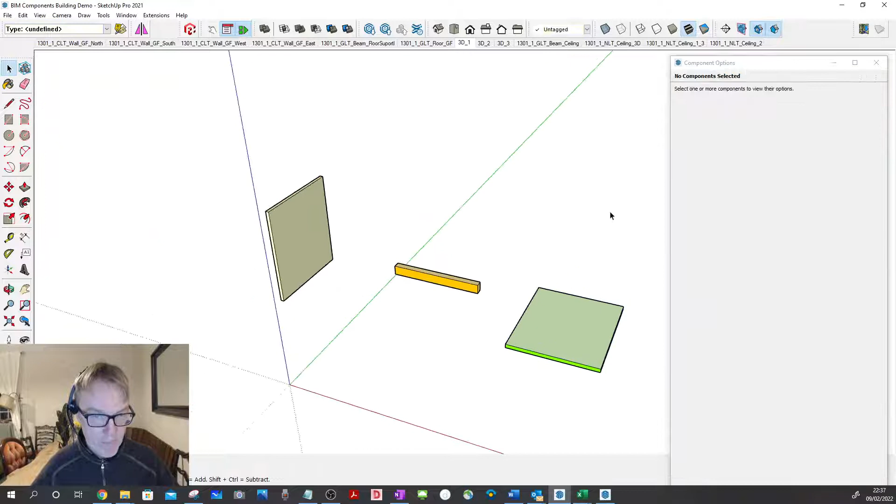If I go over to this building here, which is the ground floor module of the SNRG building, we can see that the CLT walls have been specified accordingly. We've got the GLT floor slab as a slab orientation. We also have some of the beams at the top acting as beams and the configurations required for that. And then we have the NLT, nail laminated timber ceiling panels. Again, the configurations for this.

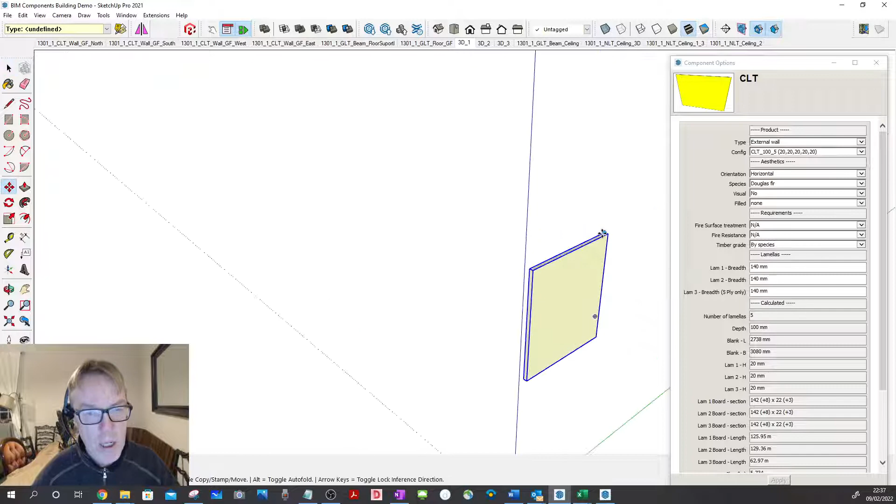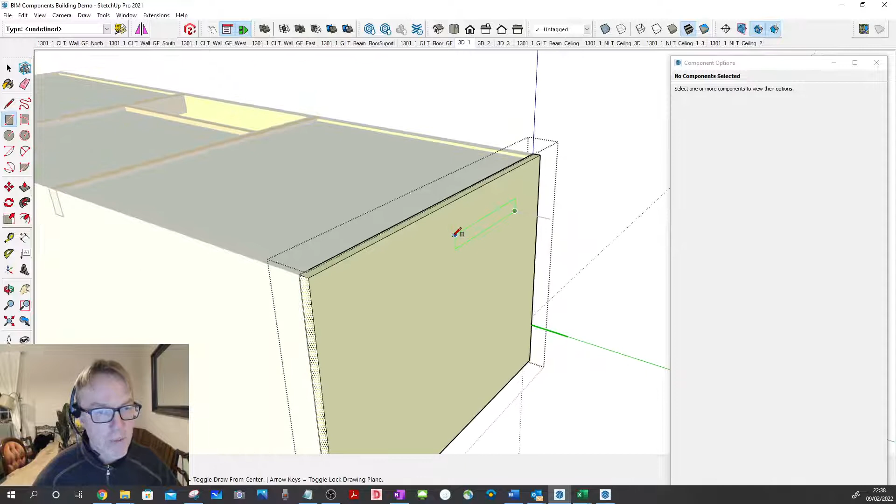If I want to finish this building off, I'm going to select my CLT panel. I'll move it or keep the original in place. I'll make it unique. And then I'll just fix my geometry first of all, and I'll also cut a window in this elevation. And then I'll go in to the option and modify for this particular building.

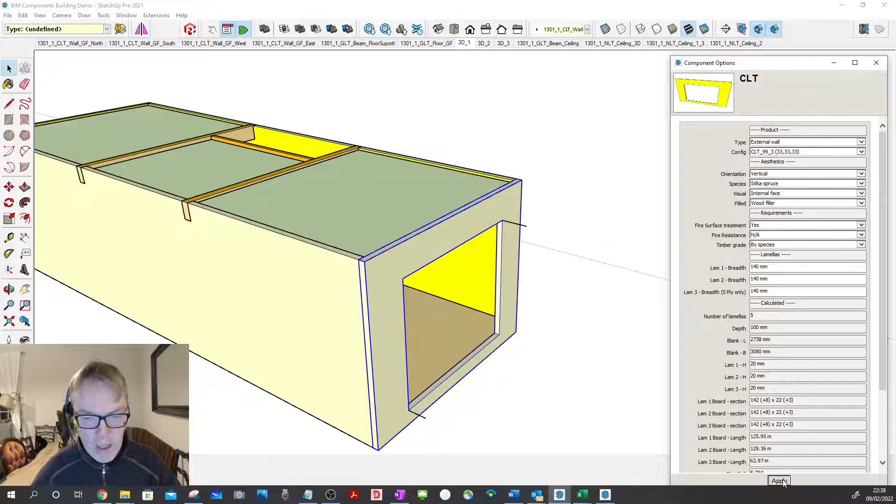I want the 99mm CLT, a vertical orientation, a Sitka spruce, visual on the internal face, filled with wood filler, surface spread of flame treatment. Yes, I don't need fire resistance. Grade by timber species, and that's all the options that I need to do. Press apply. We now have the ground floor module complete.

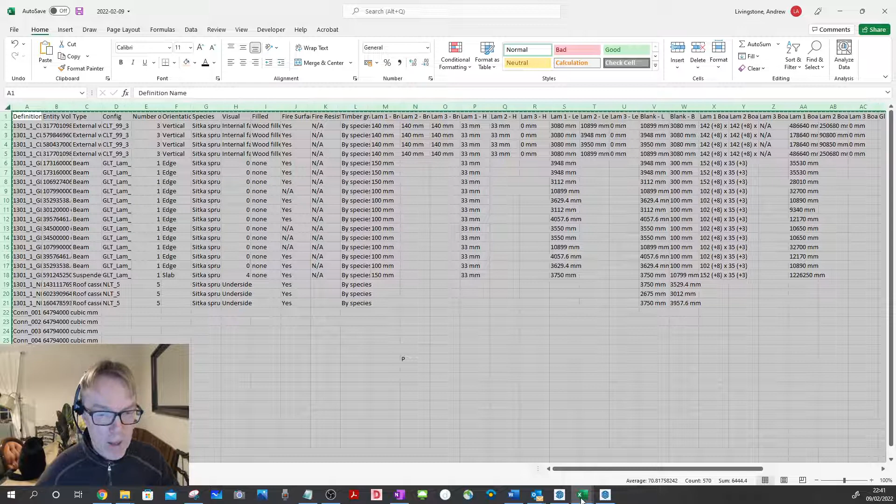Select the whole module. I can go to File, Generate Report. Then I can now run my report. And we'll download. Now I've got my report downloaded, I'm going to select the whole document, press copy, and I'll paste it into my template pre-prepared. I now run the macro.

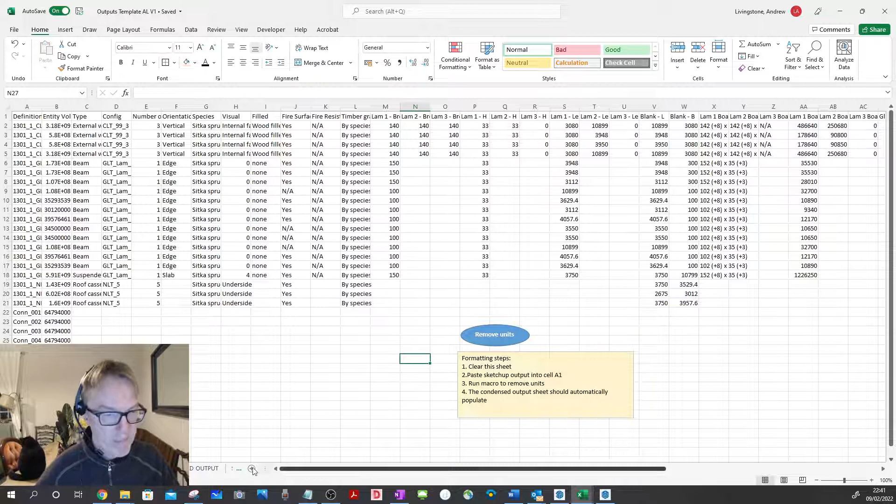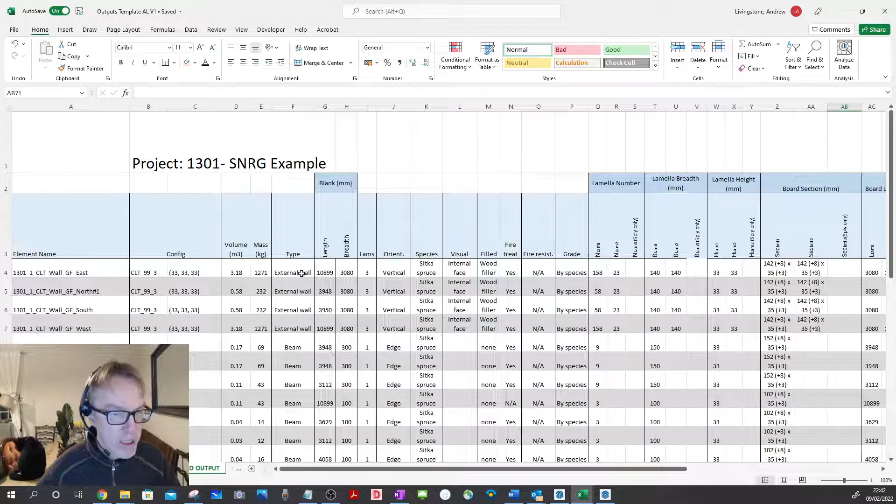That was by accident. And now I can see the data required for each of these panels, all the CLT panels, the GLT, the NLT, and also all of my connections from panel to panel, object to object as well. So in the panel you can see the configuration, the mass of each panel for lifting purposes, type, orientation, all the timber that's required, the volume of timber or the length of timber required, even the amount of glue that will be required for each of the panels.

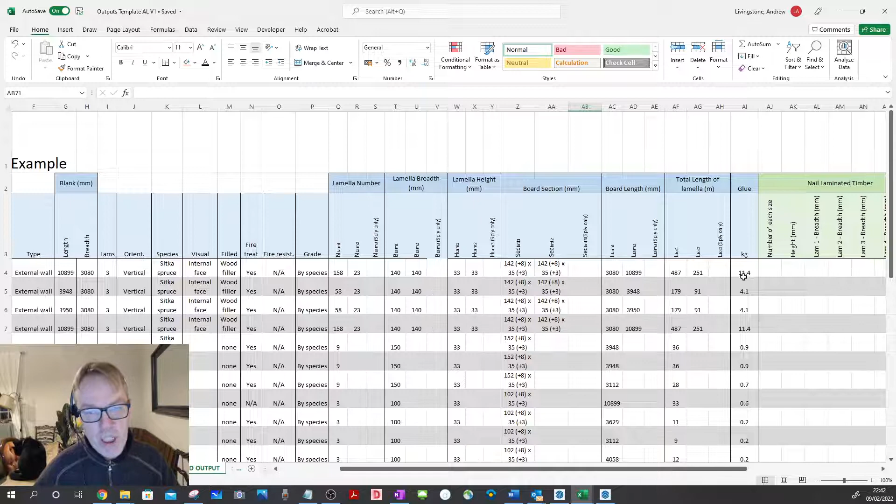We also have for the NLTs, nail laminated timber, the type of fixings required, the spacings, and the total number for each panel. Then we also have for the connections from object to object or panel to panel, all the fixings required. That's an EROTeck screw, 6mm by 180 and a 6mm by 240, the spacings of each of the connections, and the total number required for each of those connections.

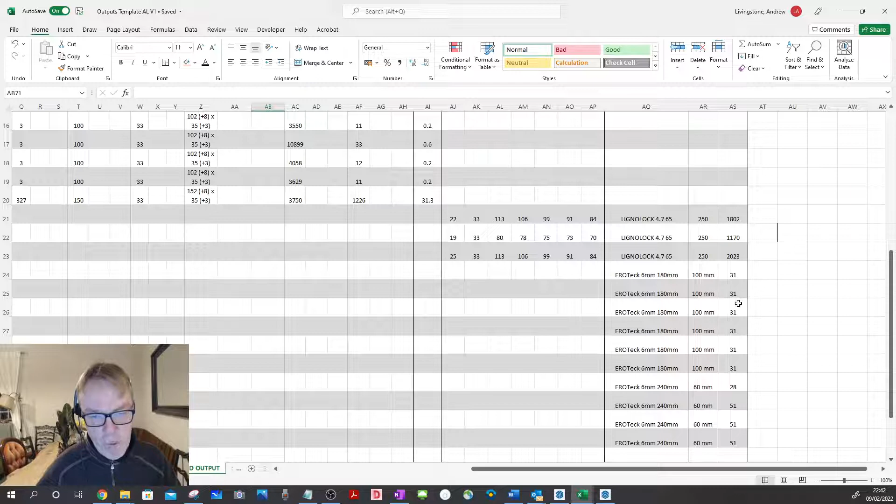So this is all the data that you need for manufacturing, along with obviously the manufacturer drawings that you've seen in the report.